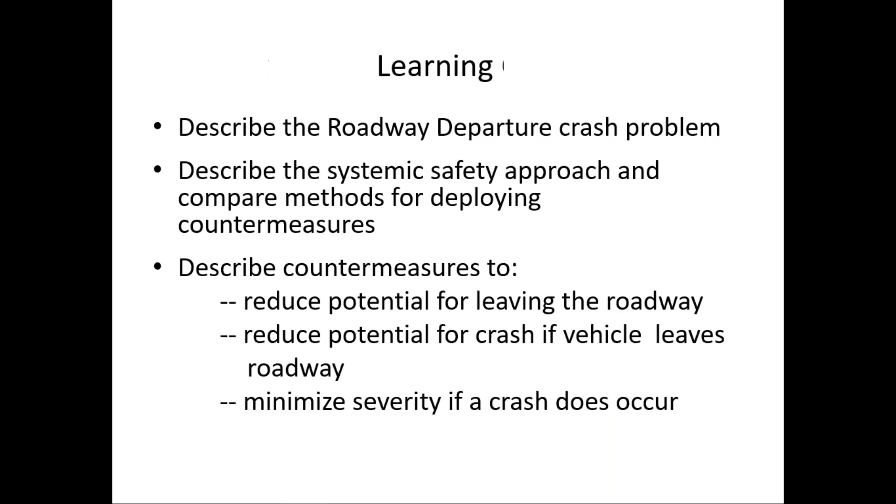I've broken this down into 6 parts over 3 days. Today we'll do an introduction and overview about roadway departures and about implementation approaches in part 2. Then we'll talk about keeping vehicles on the roadway using signing and delineation techniques, which will probably bring us into day 2 tomorrow as well. In part 4, we'll talk about keeping vehicles on the road using pavement and geometric techniques. Then we'll talk about improving the recovery area, which will probably bring us to the 3rd day, as well as minimizing the severity of crashes in part 6. So that's our agenda over the next 3 days.

Why don't we get started? Part 1 is the introduction and overview of the roadway departure crash problem. Here are the specific learning outcomes for this part. I hope you'll be able to describe the roadway departure crash problem, define what we mean by roadway departure crash, and understand some of the risk factors for addressing roadway departure crashes.

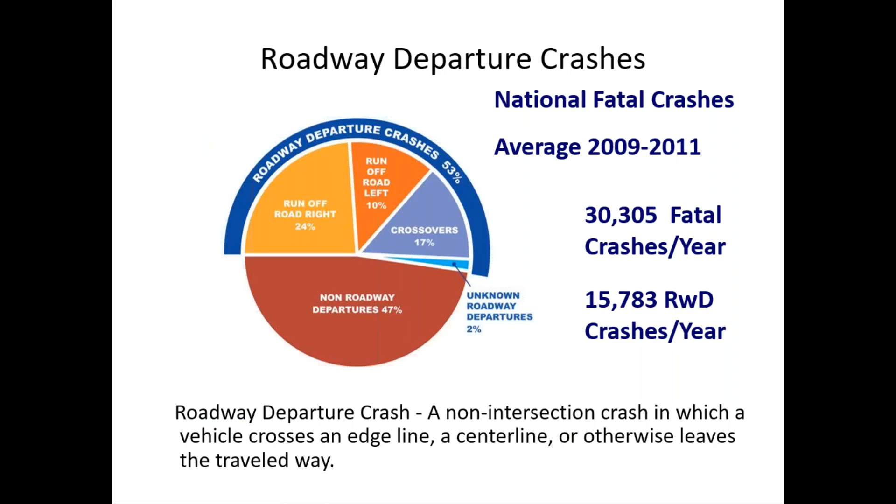It varies from year to year, but generally a little bit above 50% of all roadway fatalities are roadway departure crashes. Those can be run off the road to the right, about a quarter of fatal crashes, run off the road to the left, about 10%, and crossovers, meaning leaving the motorist lane of travel going left, crossing into the opposing direction of traffic. Non-roadway departures are usually between 45 and 50% of fatal crashes each year.

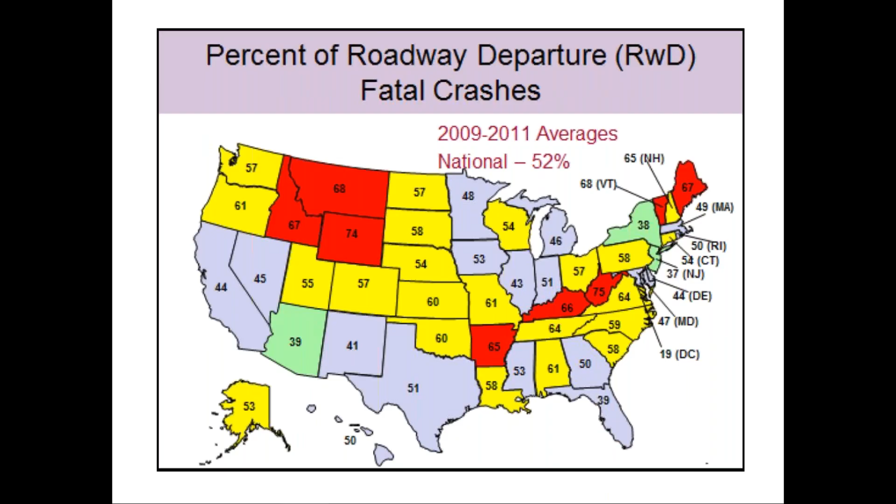So roadway departure crashes are significant. The figure now is about every 30 minutes there's a roadway departure fatality, meaning on an average day, about 48 people will die in roadway departure crashes. To bring it closer to home, if we're going to be in class for 6 hours this week, if this is an average week in the United States, while we're in this class there'll probably be 12 people nationwide that will die in roadway departure crashes. So it's a significant safety issue, which is part of the reason we're going to spend time this week talking about it and how we can reduce roadway departure fatalities and serious injury crashes.

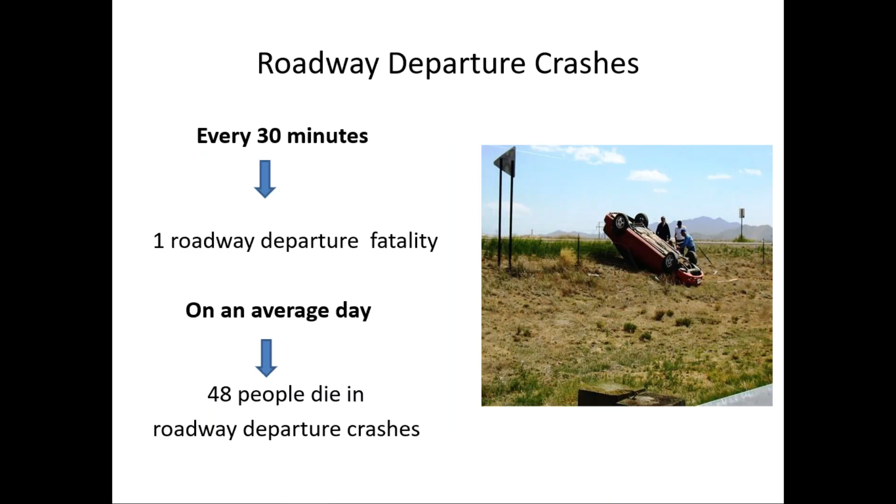Bring it a little closer to home. I know we may have folks from other states, but Ohio LTAP is sponsoring this class, so I'm going to focus on Ohio data. And of course, there's always a time lag of a year or two between the end of the year and when the final roadway statistics are published.

So this was the most recent full year of data for Ohio. Notice there were about 7,500 serious injuries in Ohio in 2023, and this was actually down from the previous year. About 1,250 fatalities, which was also down. So these trends are favorable.

Notice there were about, Ohio calls them lane departure fatalities, which I mentioned earlier, about 615, which was also down. And so that roadway departure percentage of all fatalities is about 50%, which I think is roughly consistent with what I mentioned nationally. I think nationally it's a little bit higher than 50% in terms of the roadway departure percentage of fatalities.

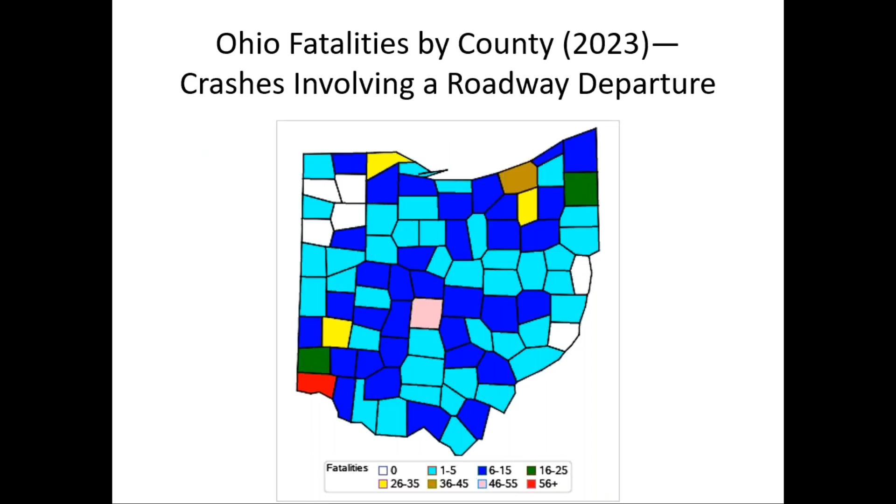But interestingly, notice there's a handful of additional counties that in 2023 did not have any roadway departure fatalities. So that's a good thing as well.

But I did want to mention just quickly, we're going to focus on the roadway departures since I think most people here are involved in the roadway and public works side of things. But some of the other emphasis areas obviously relate to roadway departures as well. For example, speed. Probably the higher the speed, the more likely someone is maybe to depart the roadway at some point. And it may also be related to young drivers, for example.

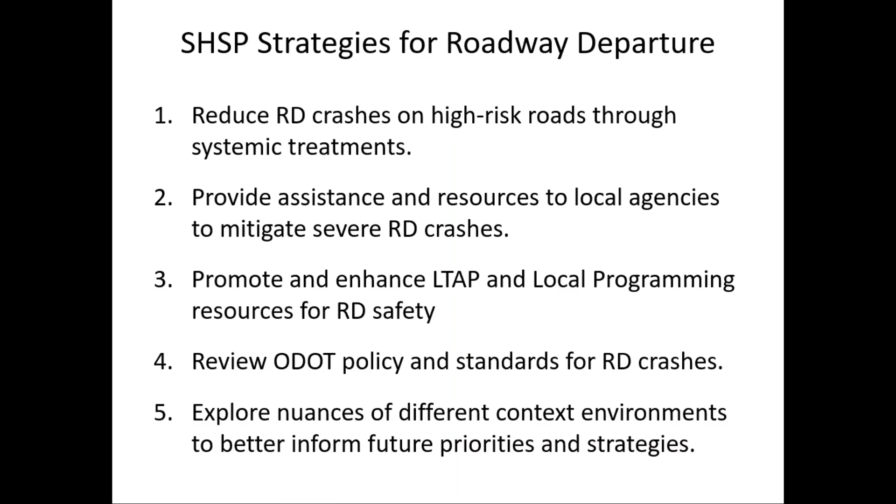With that background, let's look in more detail at some of the characteristics of roadway departure crashes. This first one shows the first harmful event in fatal roadway departures—the first event that caused harm in a roadway departure crash. Notice the light blue on the right of this pie chart is a fixed object. In almost 60% of fatal roadway departure crashes, the first harmful object could be a utility pole, a tree, a rock outcrop, those sorts of things.

Notice about a quarter of the first harmful events were another vehicle striking another vehicle, which could be a lane departure crossing the center line into the opposing lane and striking another vehicle. In about 1 out of every 6 fatal roadway departures, the first harmful event was an overturn, meaning probably the vehicle left the road on a steep slope and overturned. Then in 2% of the cases, the first harmful event was pedestrian or bicycle.

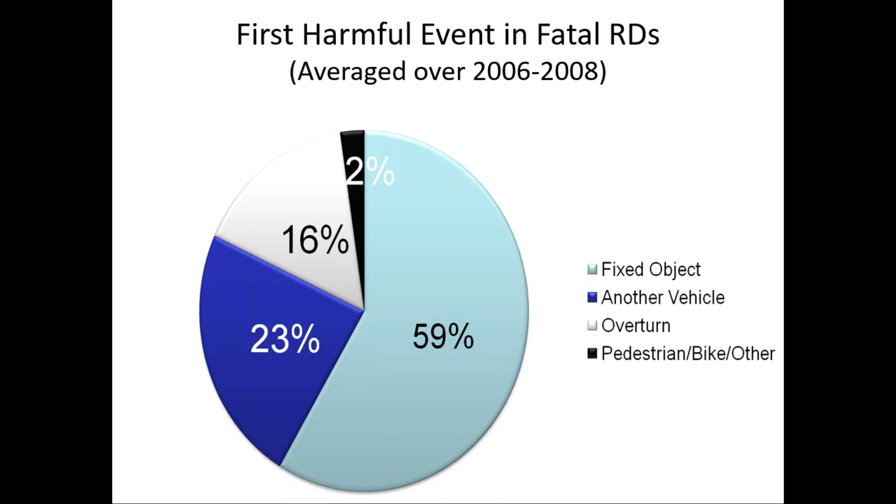Looking at each of these in more detail, starting with the overturn category, then we'll look at opposing traffic and trees and shrubs. Notice that for the overturn, the risk factors are rural areas, which is where the slopes or side slopes would be along the roadway, posted speeds greater than 45 miles per hour—so rural road speeds as opposed to city street speeds—and curves. We've talked about how roadway departures tend to be overrepresented in curves.

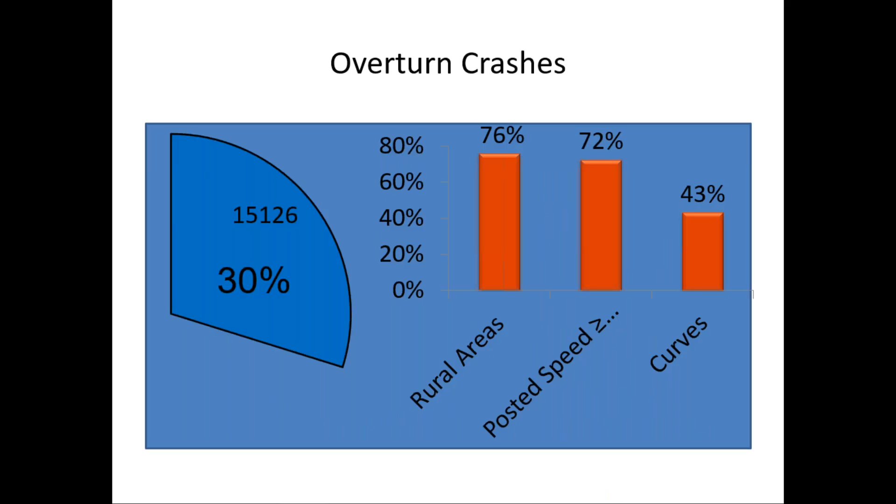Fixed object crashes overall were 19% of roadway departures causing the most harm for occupants, but notice trees are 44% of fixed object fatalities. In fact, as we'll talk about, in the United States trees are the most commonly struck fixed object alongside the road.

But you can see some of the other fixed object crashes involve signs, poles, and barriers. Those are features that we in the public works field put on the roadway to communicate with motorists, to light the roadway, and to shield motorists from hazards along the roadway in the case of barriers. So some of these features we actually put out along the roadway, we need to recognize can be and are fixed objects that can cause harm to motorists.

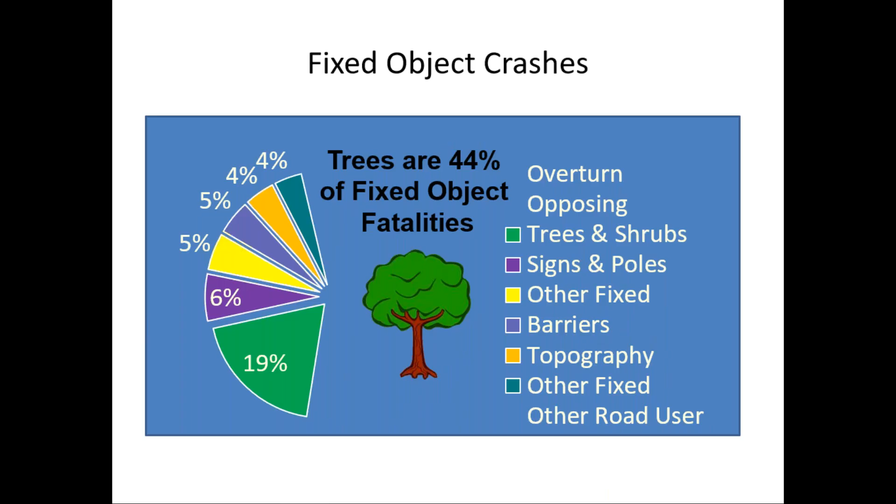So here's a little review. Welcome your participation. You can just type your responses in the chat and Mike can share some of those with us. But here's our first review question.

Which of these crash types are included in the definition of a roadway departure crash? Crashing into a fixed object like a tree or pole, hitting a deer in the traveled way, rolling over on the roadside, right angle impacts at intersections, head-on crashes, or hitting a pedestrian in a crosswalk.

Which of those do you think would be included in the definition of a roadway departure crash as we've talked about it here? Any thoughts on that? Yes, thanks Ron, we have people typing in. Several folks are saying A, C, and E.

A, C, and E. So let's take a look at that. A is crashing into a fixed object like a tree or a pole, which by definition will be alongside the road rather than in the road. So yeah, definitely A would meet the definition of a roadway departure crash. C, rolling over on the roadside, implies that the vehicle has left the roadway, so yes, that would be correct as well.

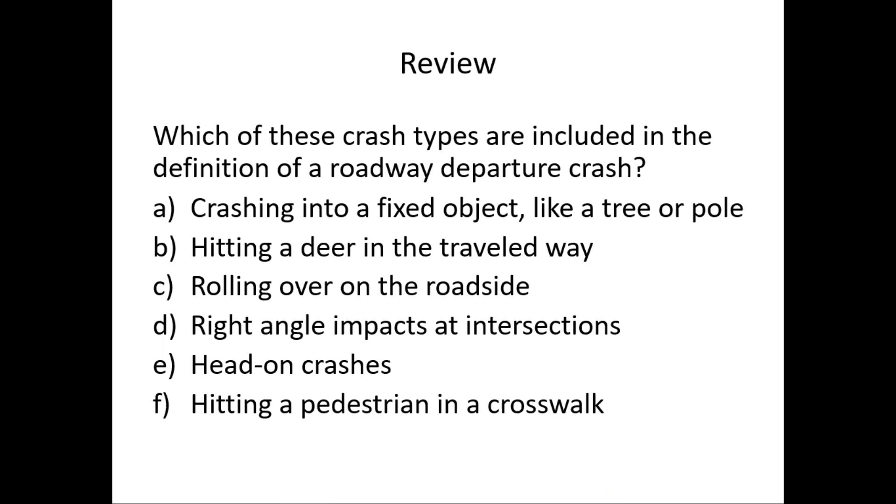Hey Ron, yeah, there's a question. Is there a breakdown of utility poles versus street signs or other objects? Yeah, there is, a good question. I think I will share that with you a little bit later when we start looking at fixed objects. I think I have a more detailed pie chart. If I don't at that time, then holler at me again and I'll be sure to address that. Sounds good, thanks, thanks.

So addressing risk factors, this is NCHRP Report 500. It's a series of 23 volumes that presents some, identify some roadway safety issues, not just roadway departures, and also some strategies for reducing crashes. It's a little bit dated now, but I think it still has some good information. Some of you may be familiar with it. Later on I'll provide some links where you can access these online.

But they talk about 3 ways to address risk factors, and this has been adopted by others, I believe AASHTO, but also it's the same organizational framework that I'll be using for this class. So they talk about first trying to keep vehicles from leaving the roadway. What can we do to keep vehicles on the roadway? Of course, if a vehicle stays on the roadway, we won't have a roadway departure.

But if a vehicle does leave the roadway, how can we minimize the likelihood of that vehicle crashing into an object or overturning on the side slope? And then the third method to address the risk factors is to reduce the severity of the crash. So notice in B, we're talking about minimizing the likelihood or the probability of a vehicle striking a fixed object or overturning on the slope. But C gets at reducing the severity if a crash does occur. And we'll look at each of these,

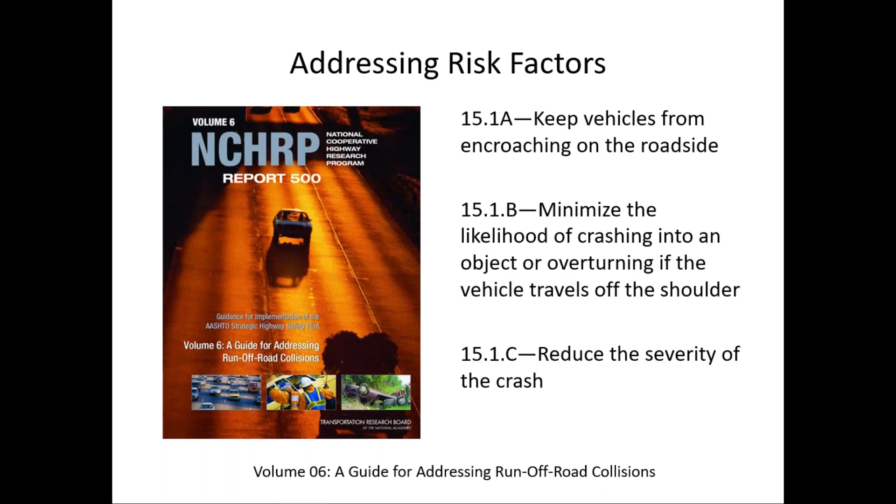starting with keeping vehicles on the roadway first, so they don't encroach on the roadside.

In some of these, I'll be mentioning crash modification factors, or CMFs, and these come from the Highway Safety Manual. They basically account for the difference between the base and the actual geometry or situation. They help us estimate the effects of individual geometry elements or signing or countermeasures on safety. They can be greater than or less than 1.

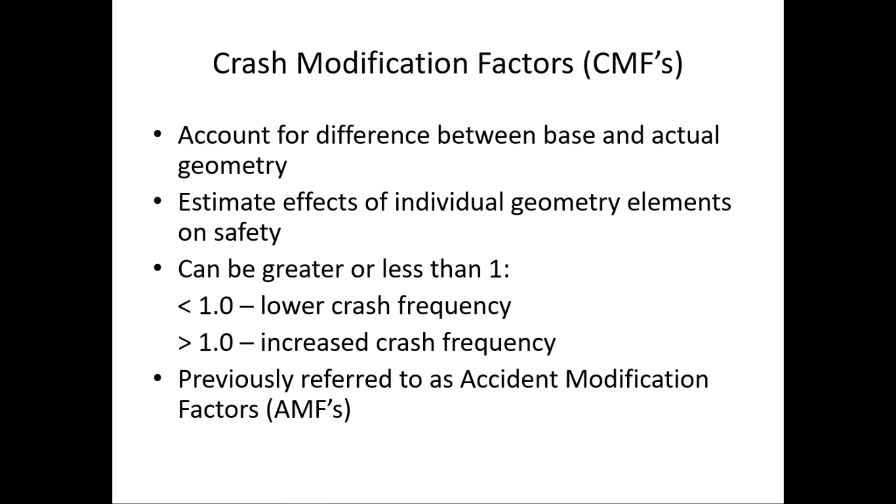If a CMF is less than 1, that means the countermeasure, such as signing or slope flattening, whatever it might be, reduced crashes, and that's a good thing. We want the CMF hopefully to be less than 1. But let's face it, sometimes we may do something and unfortunately the crash experience increases. So we may have CMFs greater than 1, but that's not a good thing because that means the crash frequency increased after the countermeasure was implemented.

You may also see as we go through here, in addition to CMFs, reference to CRFs, or crash reduction factors. This is the percent reduction in crashes that might be expected from a countermeasure. If we have a negative CRF, that means the treatment or countermeasure might be expected to increase crashes.

There is a relationship between CRFs and CMFs. A crash reduction factor is 1 minus the CMF. So if we have a CMF of 0.9, that's the same as a 10% crash reduction factor. Just keep that in mind as we go through here, since for a number of these countermeasures or treatments throughout the week, we'll talk about CMFs or CRFs. So I wanted to give a little bit of background.

Is a CMF of 1.1 a good thing? No. If the CMF is above 1, that means that treatment could be expected to increase crashes, which is not a good thing. So hopefully our CMFs will be less than 1.

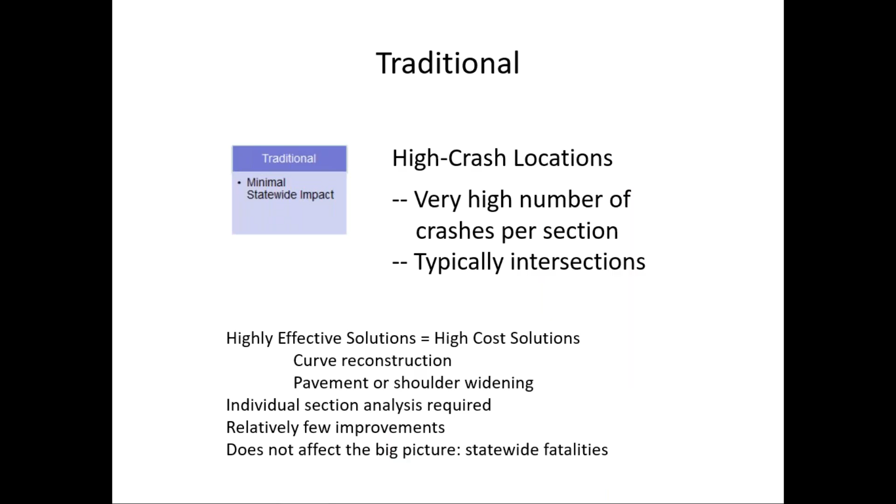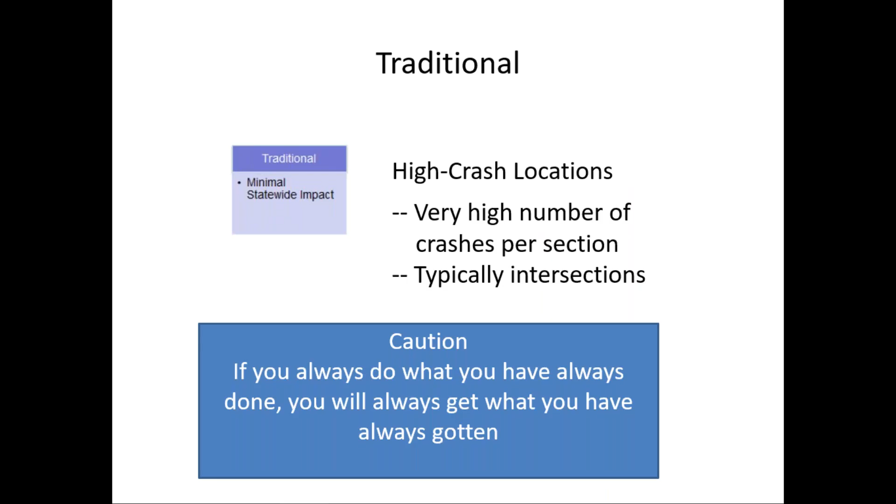So that's led to looking at other approaches that can overcome some of these drawbacks of the traditional approach, because if you always do what you've always done, you'll always get what you've always gotten. So what can we do to have a greater jurisdiction-wide impact when it comes to, for example, roadway departures? Which leads to a little example exercise here.

This may be where the systemic approach actually started historically, in Humboldt County, California, a rural county in Northern California. The county engineer was concerned about fatal crashes happening in the county.

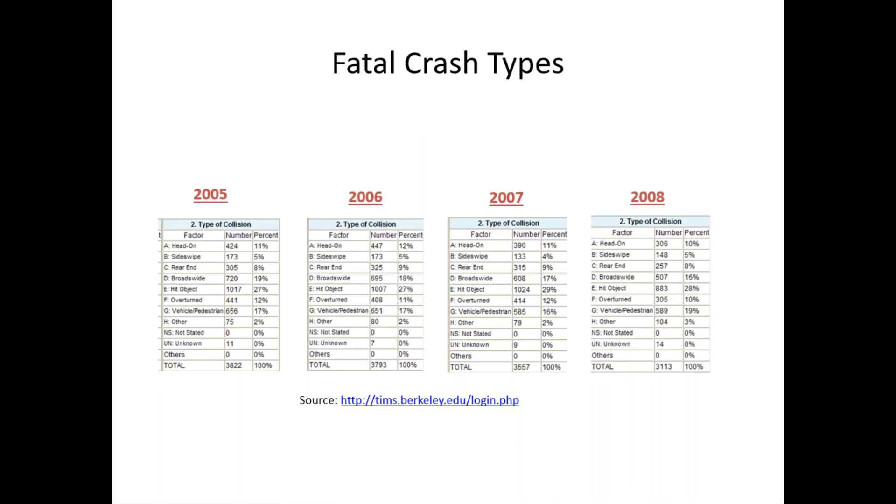Head-on crashes, about 10 to 12% each year. Also overturned crashes, item F of the factors, about 10 to 12% each year. So it struck him that in terms of fatal crash types, the overturn, the head-on, and the hit fixed object stood out as key crash types. All of these, if you think about it, are really roadway departure crashes.

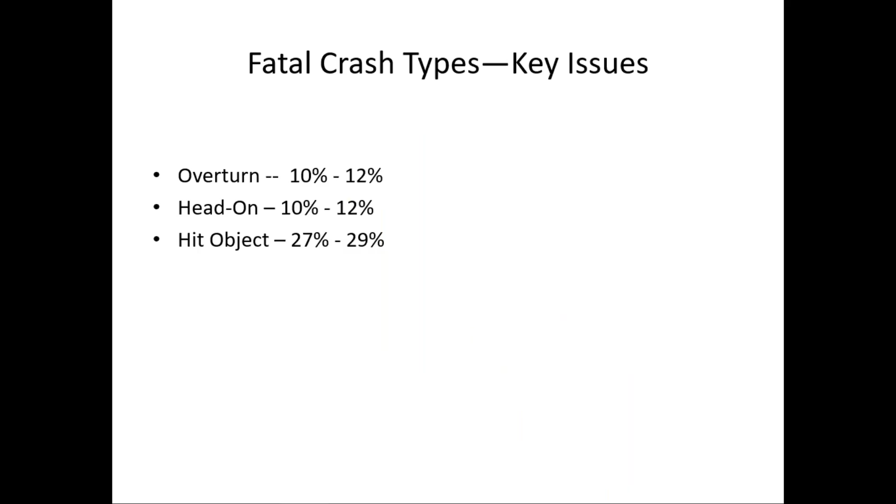So what we can say is that fatal crash locations are random, but fatal crash types are predictable. That's the basis for the systemic approach, which we'll look at.

So why do drivers leave the roadway? It could be a variety of reasons. It could be roadway condition, icy pavement, heavy rain, wet pavement, a polished roadway condition, or rutted pavement that may contribute to leaving the roadway. It could be collision avoidance, not only avoiding another vehicle or a pedestrian, but avoiding animals. Here in West Virginia, that's a major cause of roadway departures, drivers trying to avoid a deer, bear, or other animal in the roadway.

It could be vehicle component failure, a tire blowout, steering failure, brake failure, something like that. And it could be driver error, which could include fatigue, distraction, falling asleep. All of those things I would put under driver error. So there's a variety of reasons drivers leave the roadway.

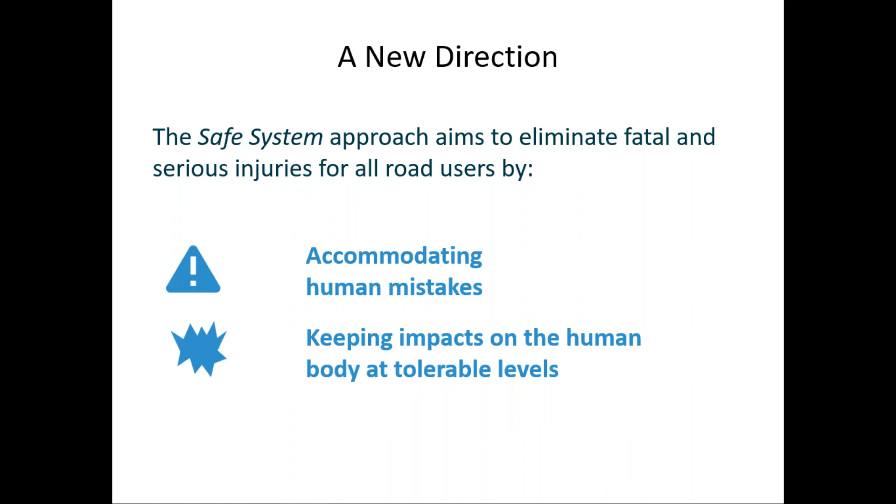I also wanted to mention, before we get too far into this, the new direction. Some of you are probably familiar with it already, but it's called the Safe System Approach, whose goal is to eliminate fatal and serious injuries for all road users by, number one, accommodating human mistakes, and number two, keeping impacts on the human body at tolerable levels.

So this is kind of the wheel that explains or describes the safe system approach. You see the 6 safe system principles around the circumference of this circle.

Death and serious injury is unacceptable. Humans make mistakes. Humans are vulnerable. Responsibility is shared, whereas in the past, maybe it was the driver was always responsible, but now it's recognized that throughout the system, we have a shared responsibility. Safety is proactive rather than reactive, and redundancy is crucial. Those are the 6 safe system principles.

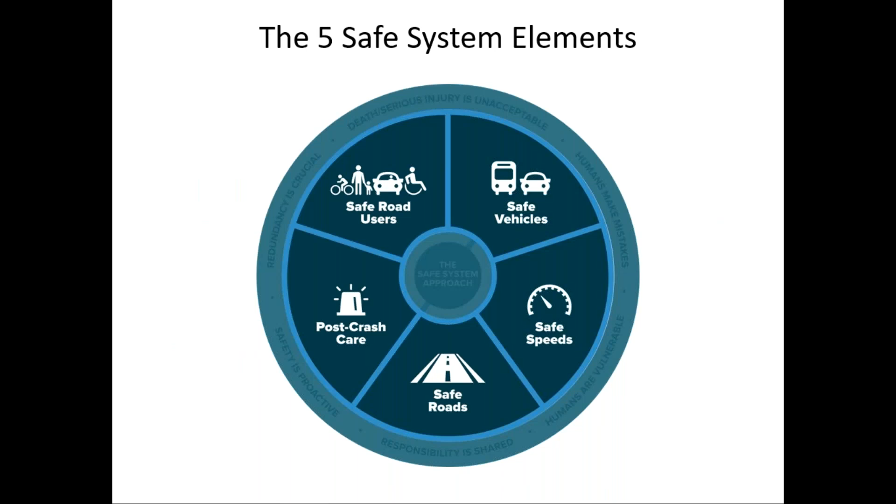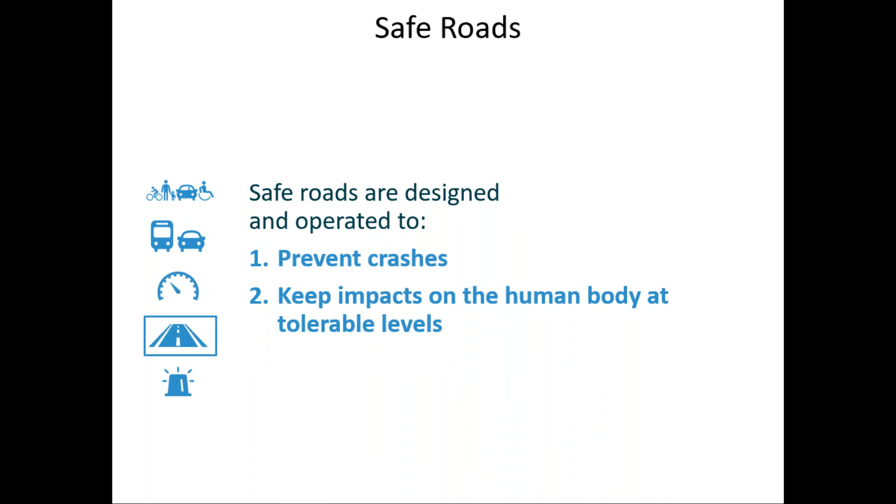And then within that, between the spokes of the wheel, if you will, you see the 5 safe system elements: safe road users, safe vehicles, safe speeds, safe roads, and post-crash care. So again, this is not just the roadway or the engineering side of things, but it even gets into the post-crash care and emergency response, like you see here. So safe roads are designed and operated to prevent crashes, and as I mentioned earlier, keep impacts on the human body at tolerable levels.

Which brings us to the systemic safety improvement strategy that I alluded to earlier. It's defined as an improvement that's widely implemented based on high-risk roadway features that are correlated with particular severe crash types. And the focus is on lower cost countermeasures.

And you can see that it's kind of based on the potential for a specific type of severe crash to occur at a specific location because of that location's characteristic or features. So whereas the traditional approach focuses, say, on one curve or one intersection, the systemic approach might look at all curves with certain characteristics on the system or in the network, and then apply low-cost countermeasures at all of those locations.

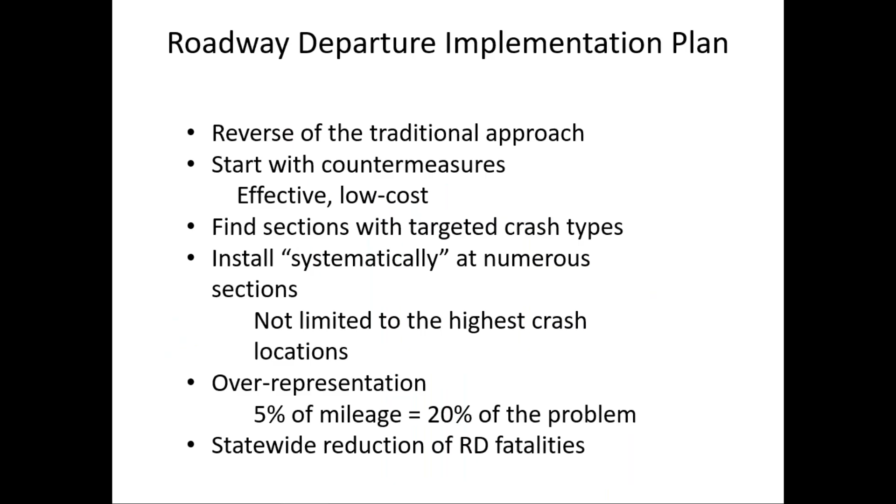It's kind of the reverse of the traditional approach. It starts with countermeasures, low-cost countermeasures, and then finds sections with those targeted crash types and installs the countermeasure systematically at a number of locations, curves, or intersections. So it's not limited to the highest crash locations. Using this approach, we can achieve significant jurisdiction-wide reduction of roadway departure fatalities.

I also wanted to mention, with the safe system approach, we should be proactive rather than reactive. Here's one way of thinking to accomplish that: keep an eye out while you're riding the roadways or while your crews are riding the roadways, and be on the lookout for certain things, certain features. I call this reading the road, looking for indications that road users may be having problems traveling a section of roadway. Sometimes we can identify issues and take steps to resolve them before crashes start occurring.

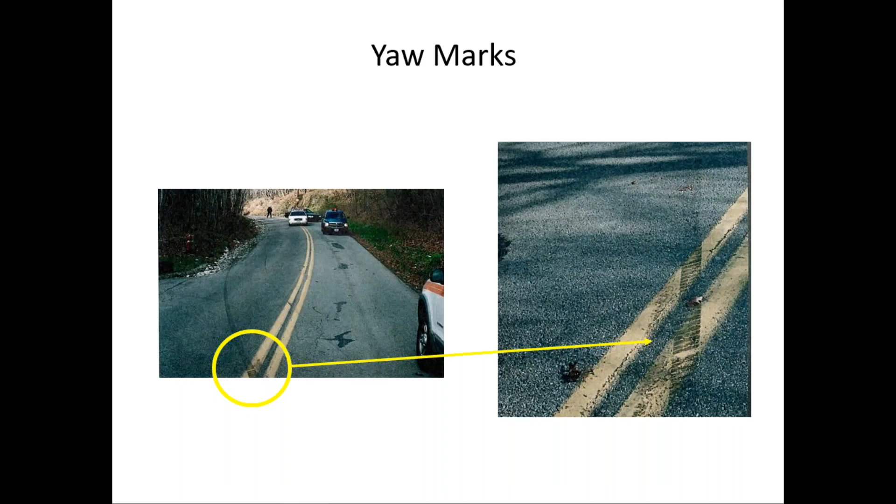The yaw marks are found usually where drivers are overcorrecting or oversteering, so they have a different causation than locked wheel tire marks. Where you see a concentration of yaw marks on a road, that can be an indication that something's going on. We don't see that here, we just see one yaw mark. That wouldn't necessarily concern me because we can find these marks anywhere, but where you start to see a clustering or concentration of them, that's when I would look in more detail.

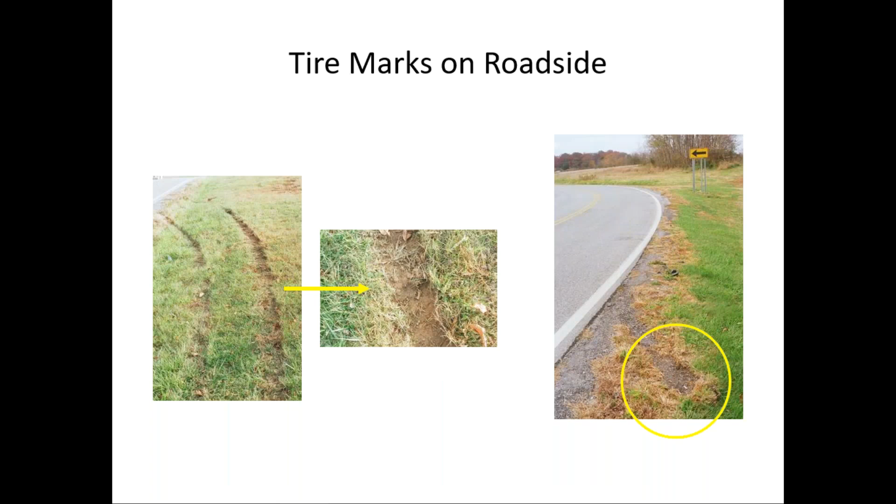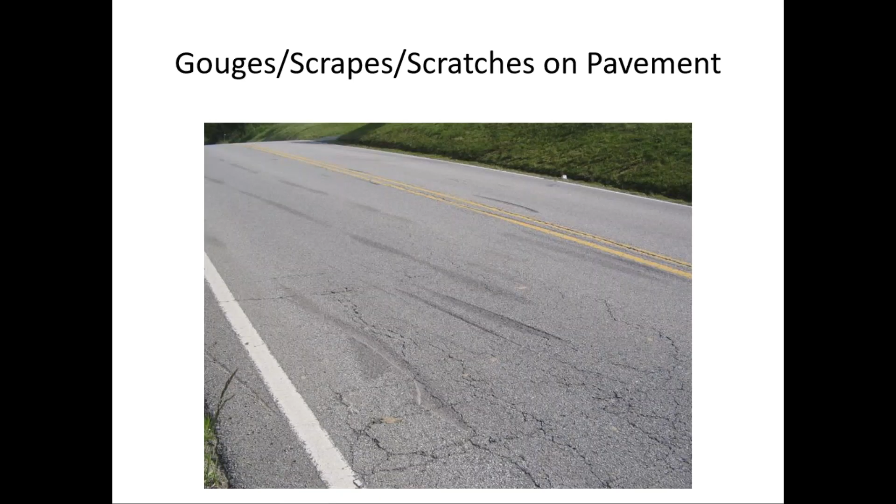Gouges, scrapes, and scratches on the pavement. We'll find these really anywhere, but when you start to see a concentration like this, that's an indication that something's going on. Vehicles look like they're overturning and sliding on the pavement.

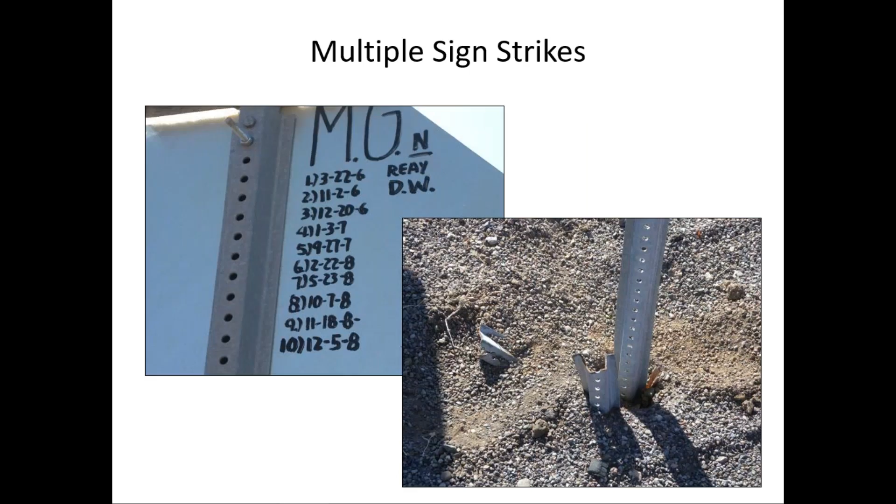I guess my question is, why doesn't somebody in the agency say, hey wait a minute, we're out here all the time replacing this stop sign. What can we do? Do we need to change the location of the stop sign or redesign the intersection, rather than just continuously replacing it? So I call that reading the road as well, looking for indications that motorists are having difficulty negotiating the roadway.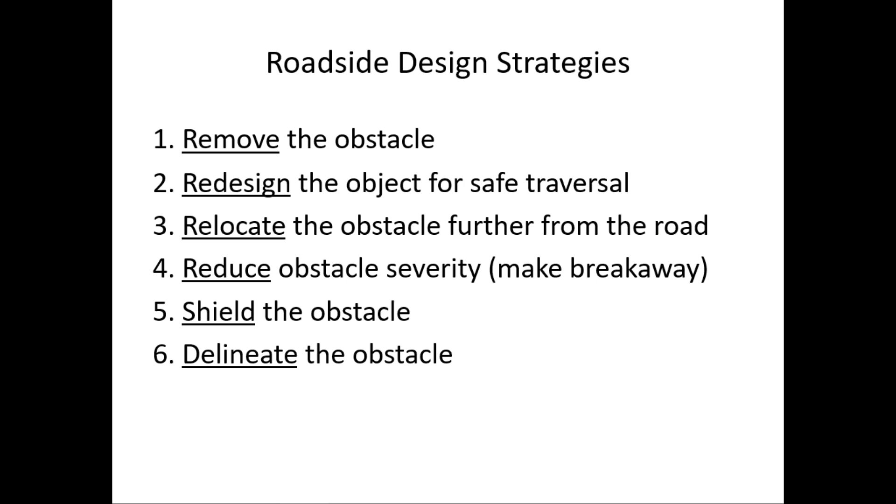So keep this in mind as we go through the next couple of days. So here we've talked about the systemic safety approach and different methods for deploying countermeasures. We also talked a little bit about reading the road. Any questions or concerns about any of that? Thanks, Ron. We don't see any additional questions at this time.

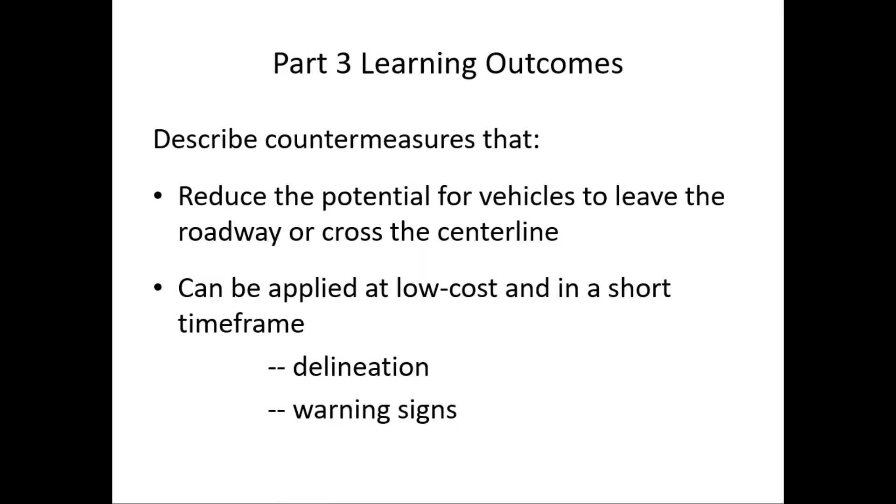Okay, thank you, Mike. That brings us to part 3, which is using signing and delineation to keep vehicles on the roadway. So that's what we're going to talk about. First item is keeping vehicles on the roadway, and we're going to focus on delineation and signing. So these are kind of low cost, short time frame countermeasures. And just to orient you, we're going to look at a number of different things today and tomorrow in terms of ways to keep vehicles on the roadway. In this part, we're going to look at marking and delineation and signs.

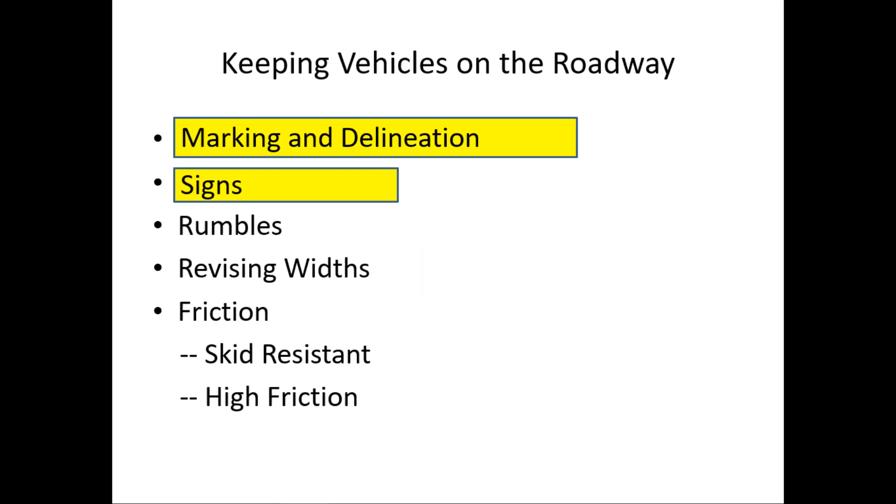What are the crash types addressed by delineation? Well, curve crashes, head-on collisions, so lane departure crashes, roadway departure crashes, nighttime crashes, and other run off the road crashes.

Some of what we're going to be referring to here when we're talking about signing and marking obviously relates to the Manual on Uniform Traffic Control Devices. And as you may be aware, there are three small but important words within the manual. If it's a shall condition, it's a standard, it's a requirement. If it's a should condition, it's recommended or it's guidance. And if the word may is used, it's an option that's available to the practitioner.

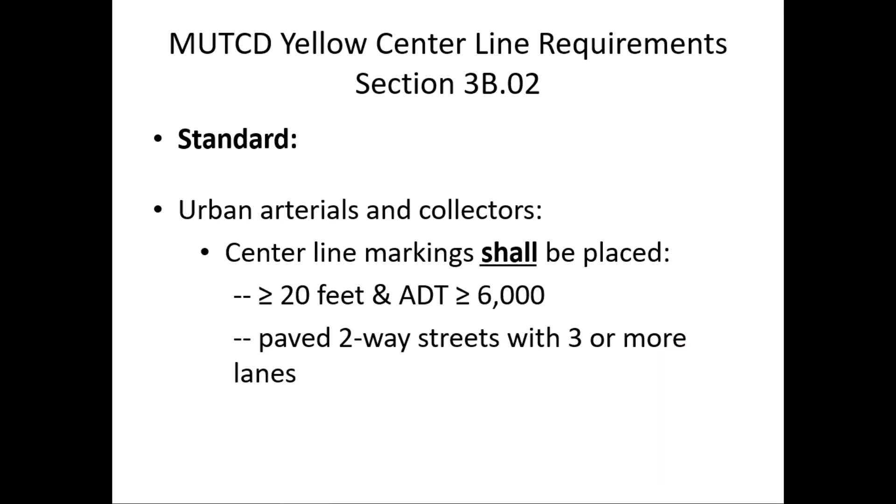So let's start with lane lines, yellow center lines. What does the MUTCD say about center lines? The standard is that for urban arterials and collectors, center line markings shall be placed on roadways greater than or equal to 20 feet and with an average daily traffic volume greater than or equal to 6,000 vehicles per day, and on paved two-way streets with 3 or more lanes. So these are the conditions where center line markings are required on urban arterials and collectors.

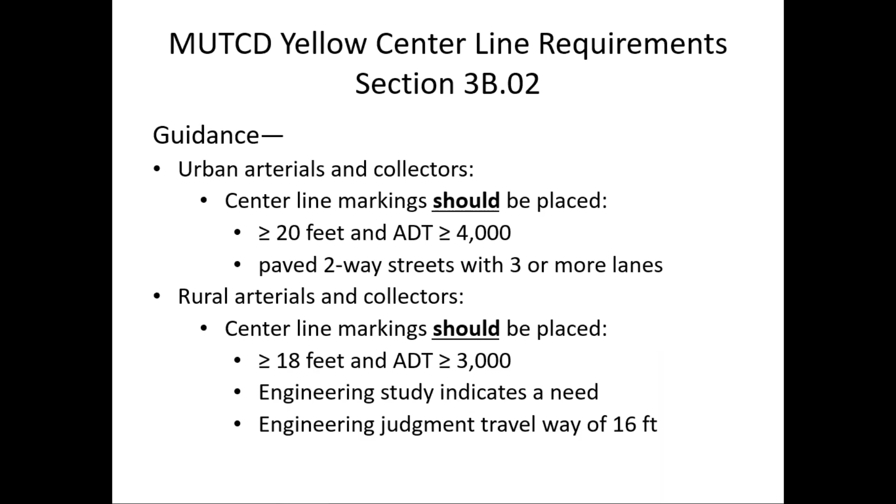The MUTCD also provides some guidance. For urban arterials and collectors, center line markings should be placed where the roadway is greater than or equal to 20 feet in width and the average daily traffic volume is greater than or equal to 4,000 vehicles per day, and on paved two-way streets with 3 or more lanes. On rural arterials and collectors, center line markings should be placed where the roadway is greater than or equal to 18 feet in width and the average daily traffic volume is greater than or equal to 3,000 vehicles per day, or where an engineering study indicates a need, or in an engineering judgment situation if the travelway has a width of 16 feet.

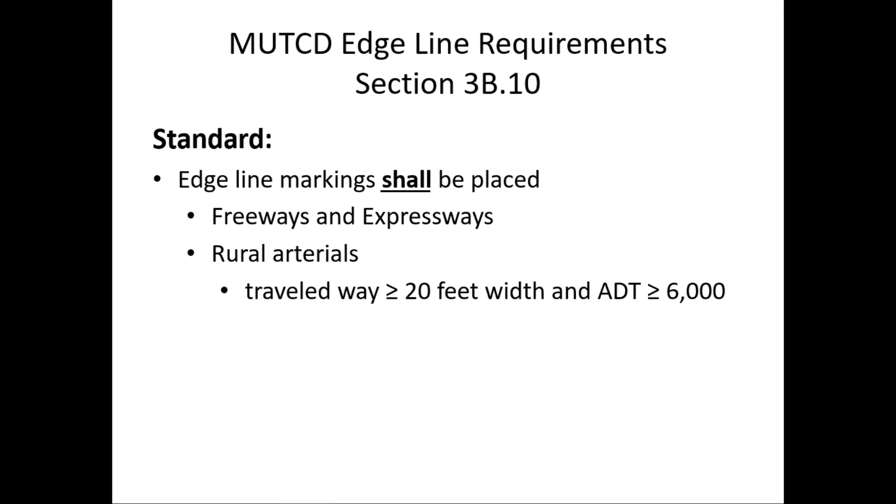Now turning to edge lines, the white lines on the right side of the roadway, sometimes called fog lines. The standard in the MUTCD is that edge line markings shall be placed on freeways and expressways and on rural arterials with a traveled way of greater than or equal to 20 feet in width and an average daily traffic volume greater than or equal to 6,000 vehicles per day. That's the standard for edge lines.

In terms of guidance or recommendation, edge line markings should be placed on rural arterials and collectors with a traveled way width greater than or equal to 20 feet and an average daily traffic volume greater than or equal to 3,000 vehicles per day, or where an engineering study indicates a need for edge lines.

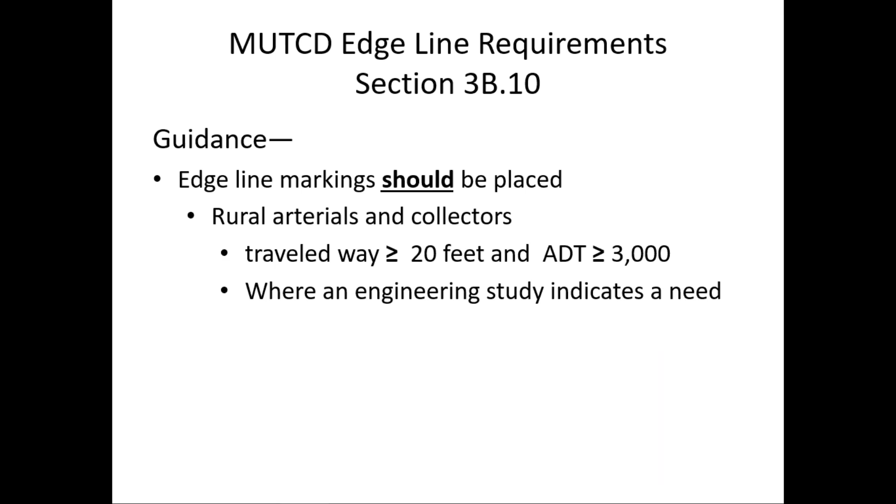What about the effectiveness of edge and centerline markings?

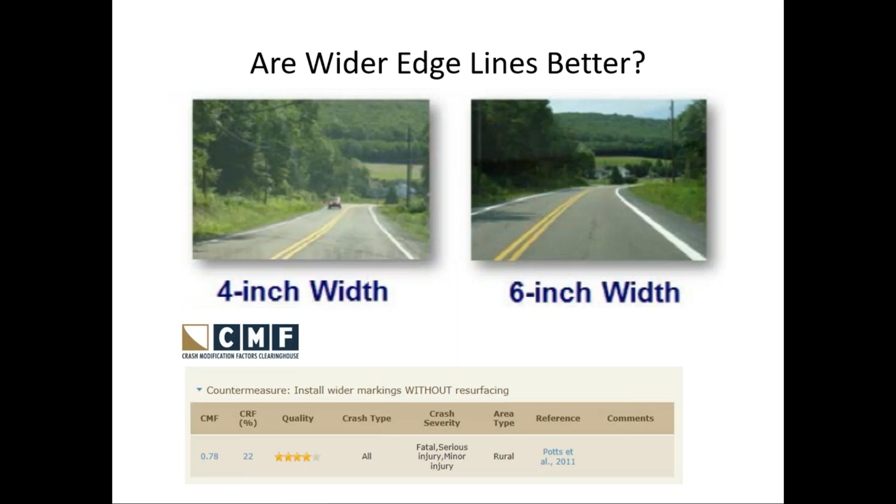Again, this comes from the CMF clearinghouse. The countermeasure is installing wider markings without resurfacing, so that's not part of a paving project, just installing wider markings. This is in rural areas, for fatal, serious injury, and minor injury crashes. On the left, you can see the CMF is 0.78, so the CRF would be 22%. It appears that wider edge lines do have a crash reduction effectiveness value of about 22% based on this study.

The Texas Transportation Institute at Texas A&M University also looked at width of edge lines. They found that wide edge lines reduce total crashes between 15 and 30%, and fatal and injury crashes by 15 to 38%. They also found, in terms of benefit cost ratio, it was between $33 and $55 for each dollar spent, which would be a significant benefit cost ratio in my opinion.

They also found that wider edge lines offered similar results, but without the concerns associated with shoulder rumble strips. So the findings in terms of crash reduction or effectiveness were similar to the shoulder rumble strips, and we'll talk about rumble strips probably tomorrow. Some of the concerns are for bicyclists and for noise and those kinds of things.

We're talking about pavement markings. There's a variety of different materials available. They do need to be retroreflective, often accomplished with glass beads, but they can be supplemented with raised pavement markers or recessed pavement markers, which provide a higher level of retroreflectivity.

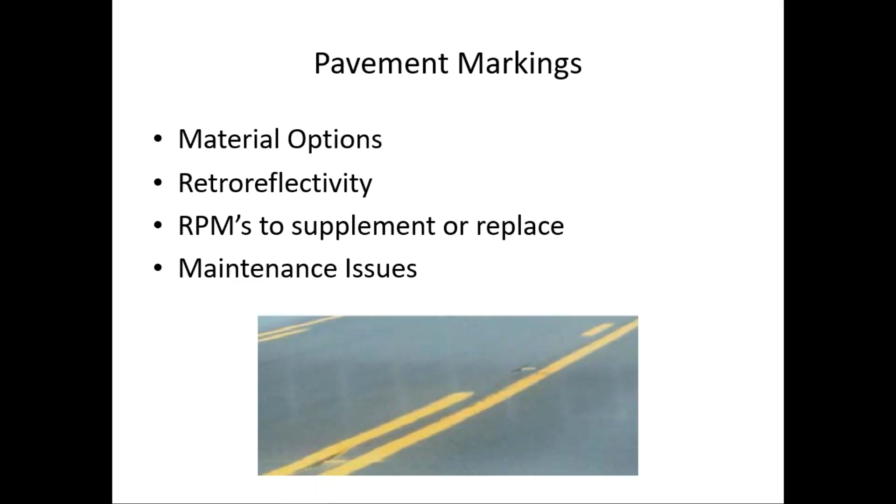But all pavement markings do have maintenance issues. They wear out, they can lose their retroreflectivity. They can be covered by mud or snow or ponded water, that sort of thing. But pavement markings are a way to help keep drivers on the roadway.

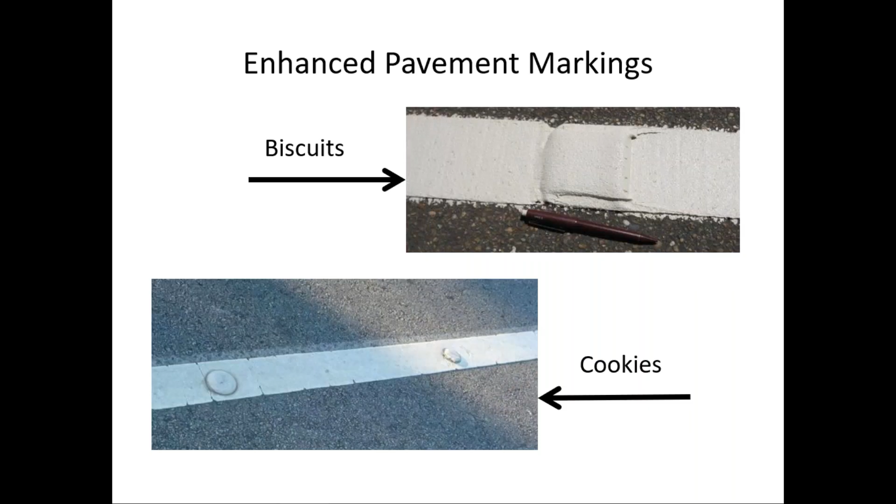Some agencies use enhanced pavement markings, the so-called biscuits or cookies, which provide a kind of raised surface above the normal line. The issue with this, though, probably in the northern part of the United States, Ohio, West Virginia, and so forth, is that these are very susceptible to snowplow damage because they protrude or project above the pavement surface.

Another pavement marking that's been used, I believe, in Pennsylvania, perhaps other states, is the curve advance marking. These are pavement markings that provide information about the curve, and they're on the roadway, so they're in the driver's direct line of sight in their field of view, and they supplement the curve warning signs that would still be needed on the roadway. So these are a supplemental type of measure.

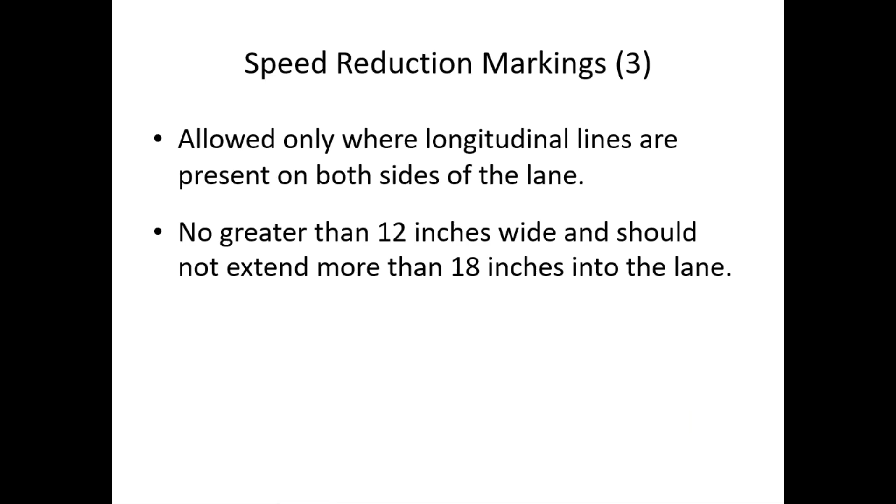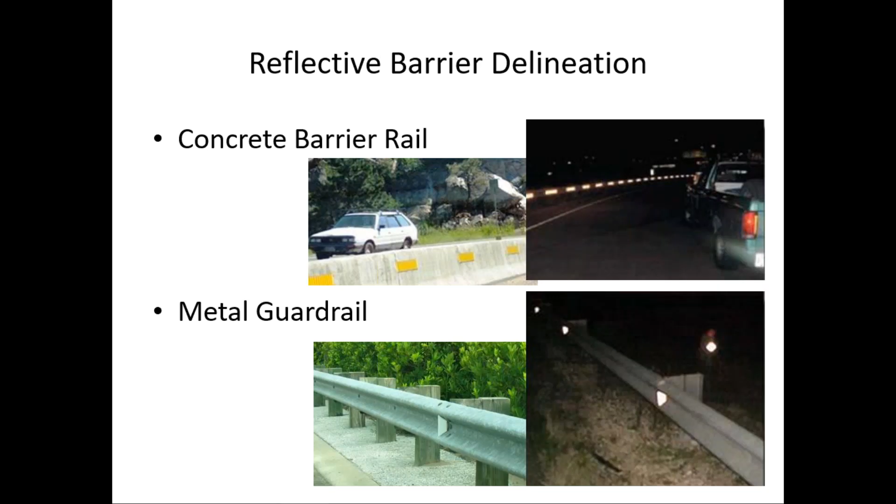Another example here, notice the W-beam guardrail, they've put reflective tape inside there, and it makes an effective form of delineation of the curve in the roadway. So signage to keep vehicles on the roadway.

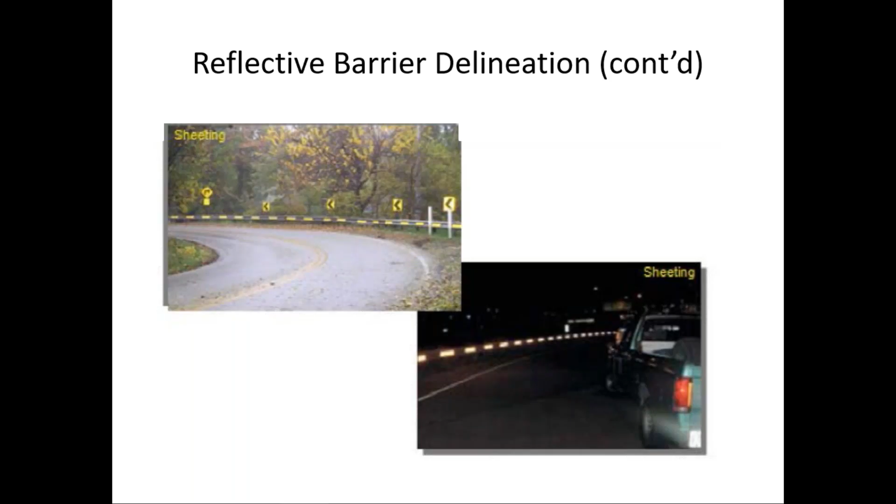We've looked a little bit at pavement markings. Now what about signage? You see some examples of the horizontal curves. The crash types addressed by signing are curve crashes, of course, and also nighttime crashes, again mostly run-off-the-road crashes.

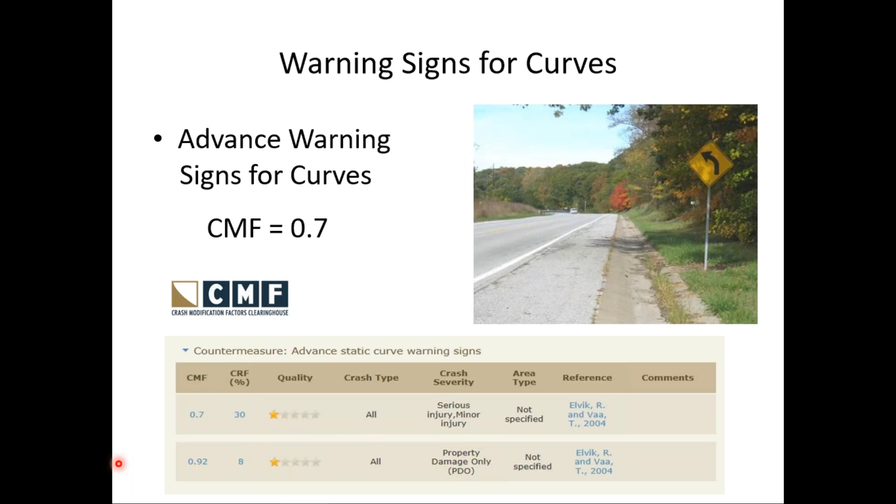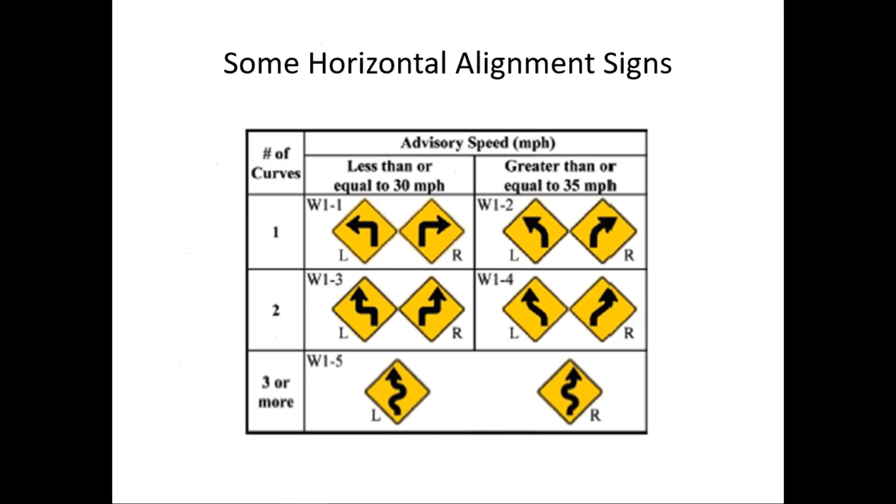Section 2C.06 talks about device selection, and this is one area I should note that in the MUTCD 11th edition, there is some significant change from the previous edition. Device selection has changed significantly, making it a multi-step process now compared to what it was in the previous edition of the manual.

They show criteria in chart A of table 2C-4, which we'll look at in a minute. Notice it says those criteria shall be used to determine the need for devices for changes in horizontal alignment. So it's a two-step process: you use chart A to determine the need, and then if the use of a device or devices is indicated by chart A, you use chart B of that same table. Chart B shall be used to specify the types of devices to be used in advance of and/or along a horizontal curve, except as provided in paragraphs 3, 5, and 6 of this section. So it's a little more involved process than in the past, but we'll go through it and look at an example.

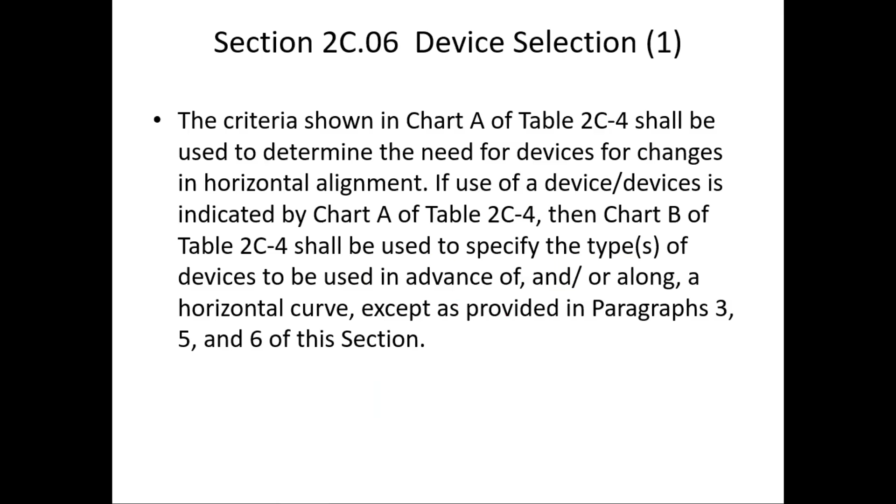The speed differential in chart B shall be the difference between the horizontal curve's advisory speed and the roadway's posted speed limit, the statutory speed limit if none is posted, or the 85th percentile speed on the approach to the curve, sometimes called the prevailing speed. So users can determine that speed difference based on the difference between the advisory speed and either the posted speed limit, the statutory speed limit, or the 85th percentile speed on the approach.

I think that's a little more flexibility than existed in the previous edition of the manual in terms of that speed differential.

I mentioned paragraphs 3, 5, and 6. This is what paragraph 3 says: a one direction large arrow sign may be used in place of or to supplement delineators or chevron alignment signs when A, site conditions limit the number of delineators or chevron alignment signs that are visible, or B, the number of delineators or chevron alignment signs that can be installed within the change in horizontal alignment is less than the number determined by the spacing specified in sections 2C.08 or 3G.04.

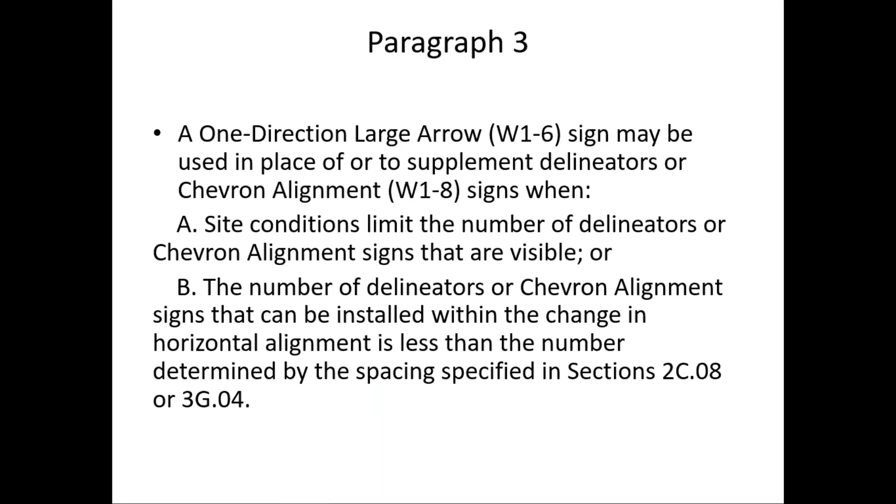So they allow the use of the one direction large arrow in place of or to supplement delineators or chevrons when you may be limited in the number of chevrons you can use. An example, I may show it later on in the week, but there's a curve I'm familiar with, not too far from me, a relatively sharp curve where chevrons should probably be installed. But right at the outside of the curve is an area where like 3 or 4 driveways come together into one big driveway or access point to the roadway. And of course, you couldn't reasonably put chevrons in that area of the driveway opening. So this is saying you could use a one direction large arrow in that situation.

Paragraphs 5 and 6. Paragraph 5 says devices for changes in horizontal alignment may be omitted when the speed limit on the approach to an alignment change is 20 miles per hour or less. Paragraph 6 says devices for changes in horizontal alignment may be omitted on urban streets with an AADT of 1,000 vehicles per day or less. So in 5 they're talking about low speed roads, and in 6 they're talking about lower volume roads in urban areas where those devices can be omitted. And notice it's a may be omitted, so it's an option.

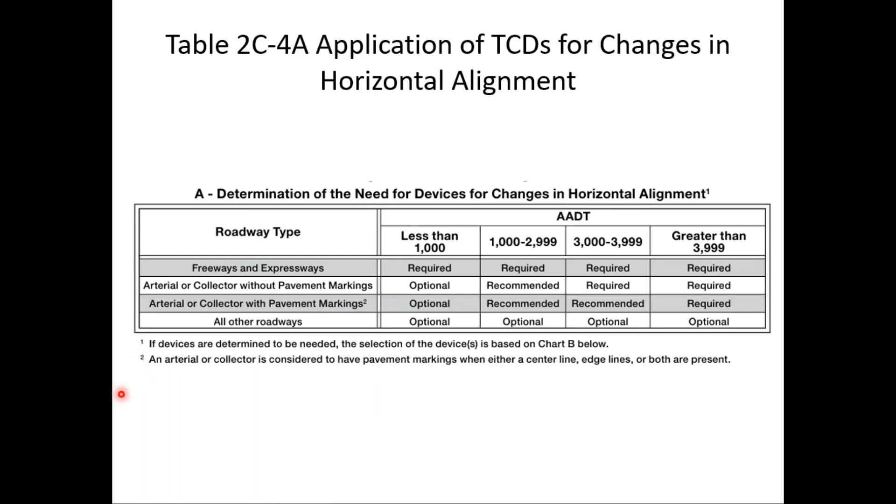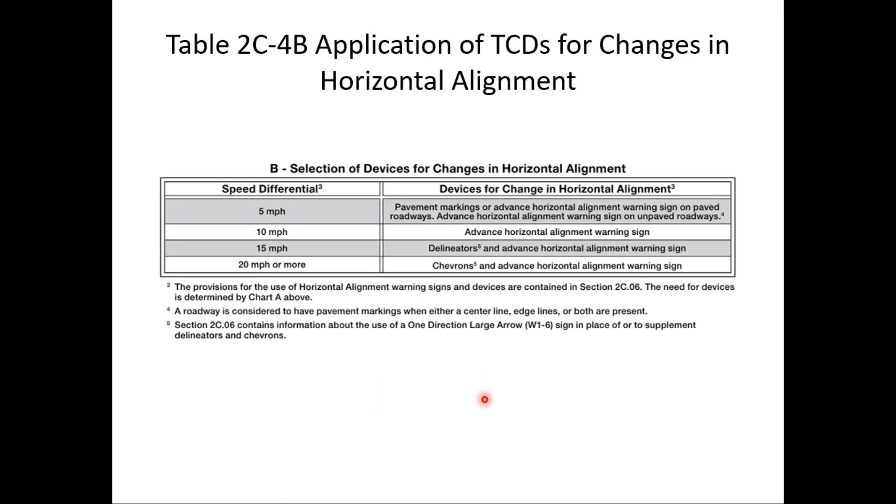Section 2C.07 addresses horizontal alignment signs. It says if table 2C-4 indicates that a horizontal alignment sign is required, recommended, or allowed, the sign installed in advance of the curve shall be a curve sign unless a different sign is recommended or allowed by the provisions of this section. And the guidance says a turn sign should be used instead of a curve sign in advance of a horizontal curve that has an advisory speed of 30 miles per hour or less.

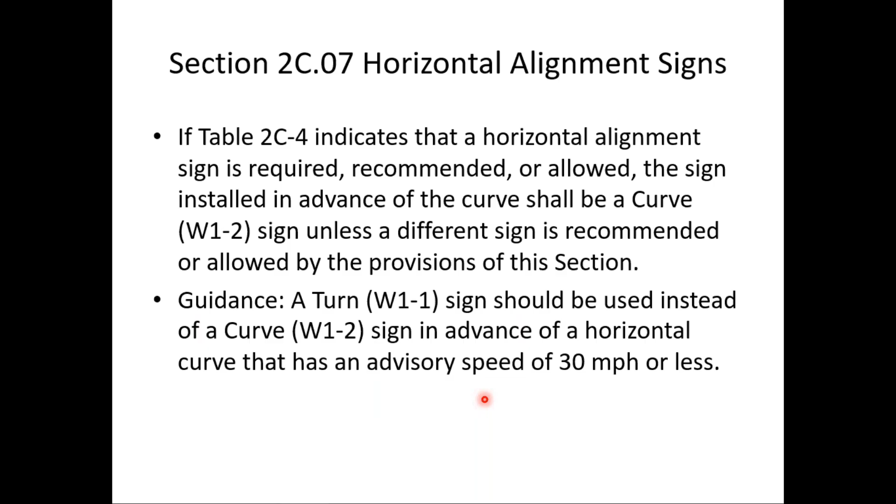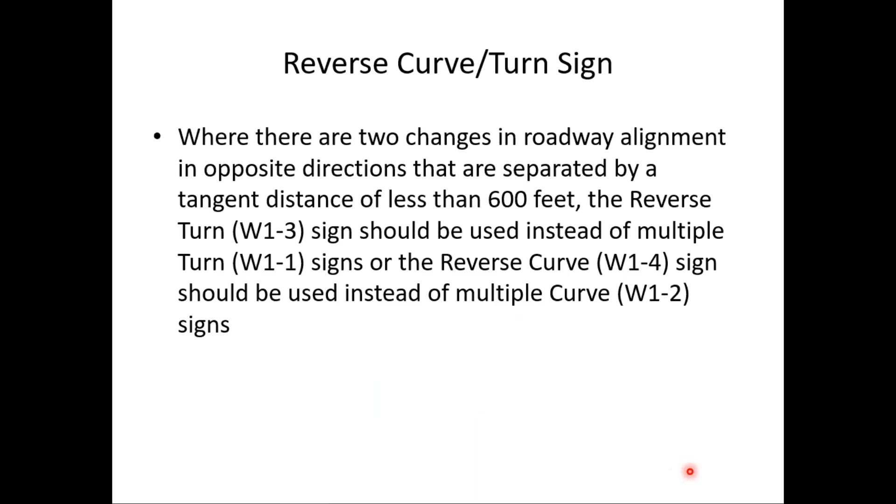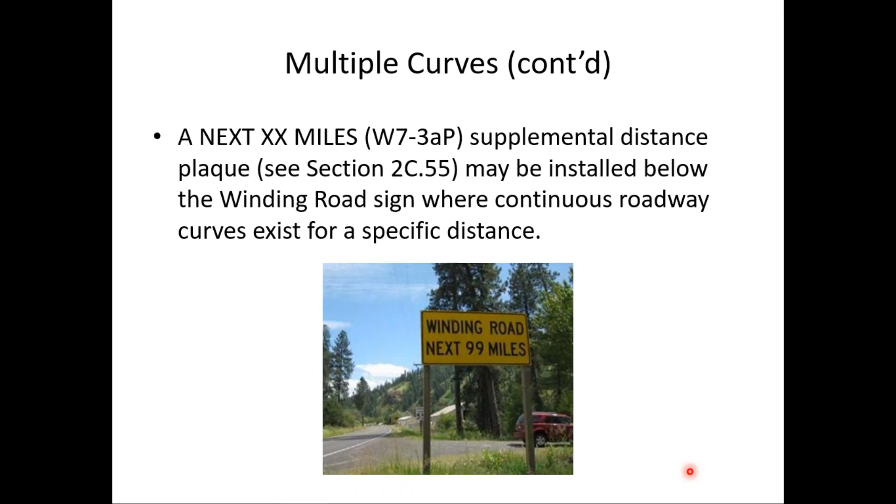They also talk about the reverse curve or turn sign and where those are to be used, and about multiple curves, the winding road sign, including the specific conditions where that would be used. You can also add a next-so-many-miles distance plaque below the winding road sign where you have a continuous roadway curvature existing for some distance.

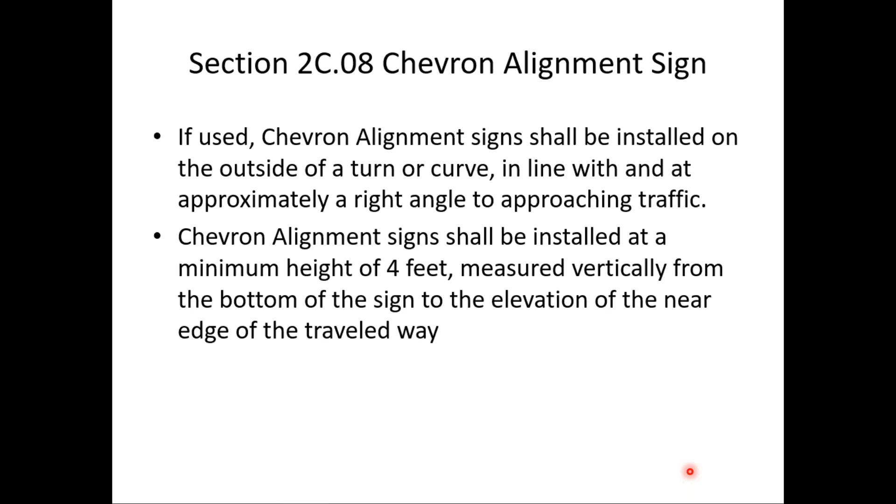Section 2C.08 also addresses the chevron alignment sign, and I think they've made this a little more specific than in previous editions. Notice, if used, chevron alignment signs shall be installed on the outside of a turn or curve in line with and at approximately right angles to approaching traffic. They shall be installed at a minimum height of 4 feet, measured vertically from the bottom of the sign to the elevation of the near edge of the traveled way. They specifically mention a minimum height of 4 feet, which I don't believe was in previous versions.

They also mention advisory speed plaques and what they call confirmation advisory speed plaques. The use of those shall be in accordance with table 2C-6, and they give the same advice I mentioned earlier in terms of determining the speed differential.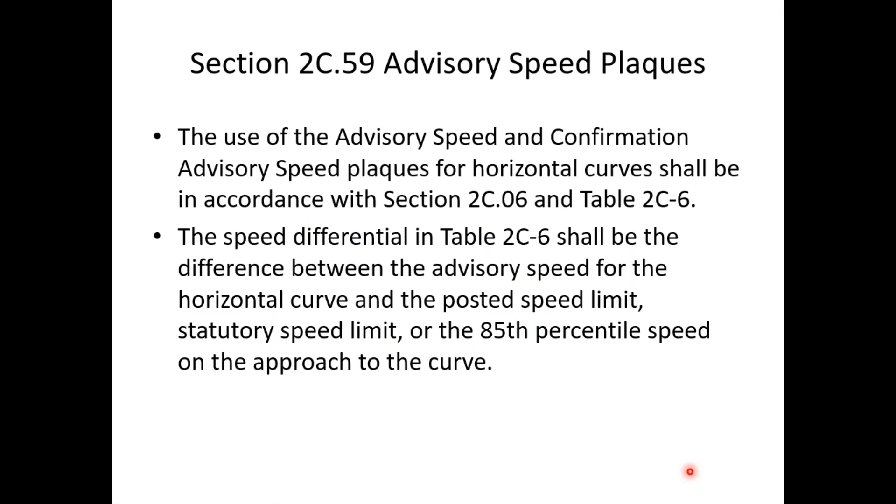So here's the advisory speed plaque. Note the turn warning sign with the advisory speed plaque underneath it. Notice they shall be used where an engineering study indicates a need to advise road users of the advisory speed for other roadway conditions.

And here is the confirmation advisory speed plaque. This can be used below, in this case, the right arrow. Notice both of these are optional.

They have table 2C-6 that specifically relates to advisory speed plaques, based on speed differential. For a 5 mile per hour differential, advisory speed plaque use is optional. A 10 mile per hour differential is recommended. 15 miles per hour or more, it's required.

A couple more notes: the advisory speed plaque shall only be used to supplement an advance warning sign. The advisory speed plaque or confirmation advisory speed plaque shall not be installed as a separate sign installation, and I think this is new as well. Sometimes in my travels, especially in small towns or villages, I would see that advisory speed plaque posted as if it were intended as a speed limit, but now the manual specifically prohibits that practice.

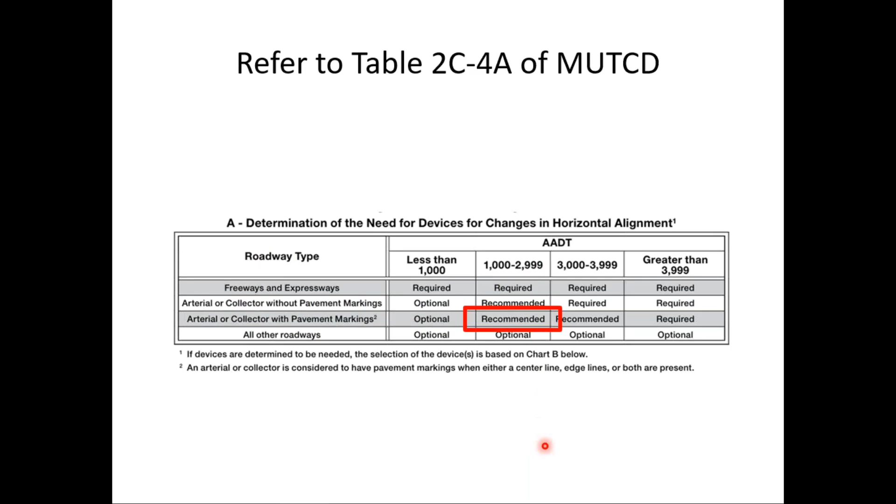And the AADT, what was it? It was 1,210, I think, so it falls within this range. This tells us that devices are recommended for this change in horizontal alignment. So then we go to part B, which would tell us what devices should be used.

So now we're selecting devices. In part B, one of the key factors is the speed differential. Let me back up here. We said the speed limit was 55, and the advisory speed is 40. So that's a 15 mile per hour speed differential, and that would be this row right here. The devices recommended here are delineators and an advanced horizontal alignment warning sign.

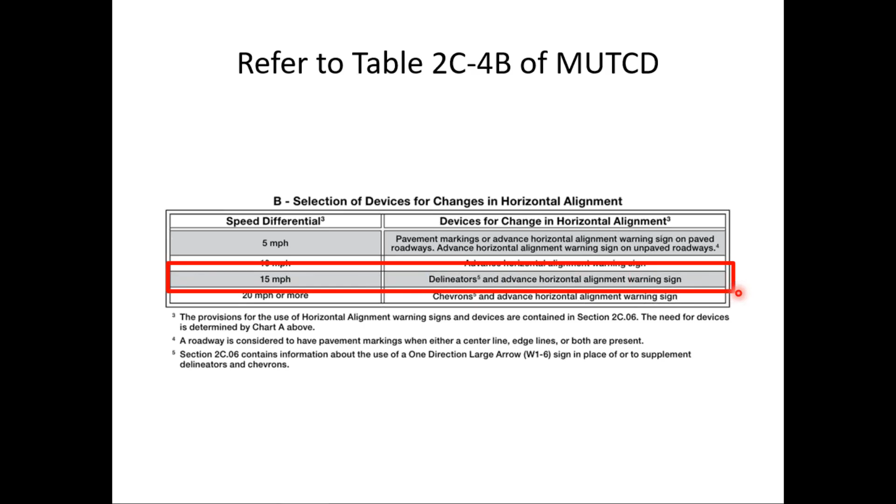Delineators would also include chevrons, which are considered a delineator. So delineators and advanced horizontal alignment warning sign. There are chevrons around that curve, or around part of it, so they've got part of that right. I would want to look at the appropriate spacing of those chevrons. And we have an advanced horizontal alignment warning sign, so let's take a look at that. Do we need an advisory speed plaque?

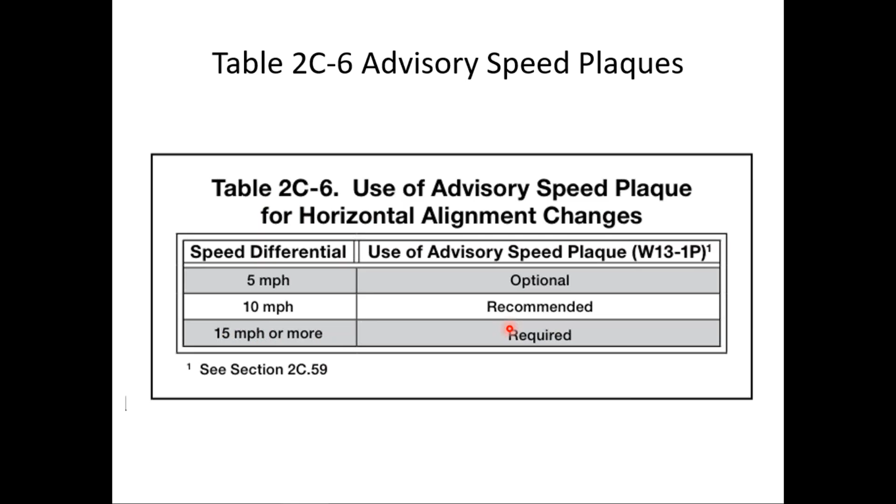Let me back up here. Notice table 2C-6: for a speed differential of 15 miles per hour or more, the use of an advisory speed plaque is required.

Chevrons are there, but they're not appropriately spaced. How would we space them? Back up to here. Advisory speed was 40 miles per hour, so 35 to 45, meaning the spacing of the chevrons should be 120 feet apart, according to table 2C-5.

So they have chevrons, but they need to be spaced about 120 feet apart around the full length of the curve. They have a warning sign, but as we just saw, for a speed differential of 15 miles per hour, which we have here, the advisory speed plaque is required. So that would need to be added to bring this into compliance.

No, thanks, Ron. Okay, thank you, Mike.

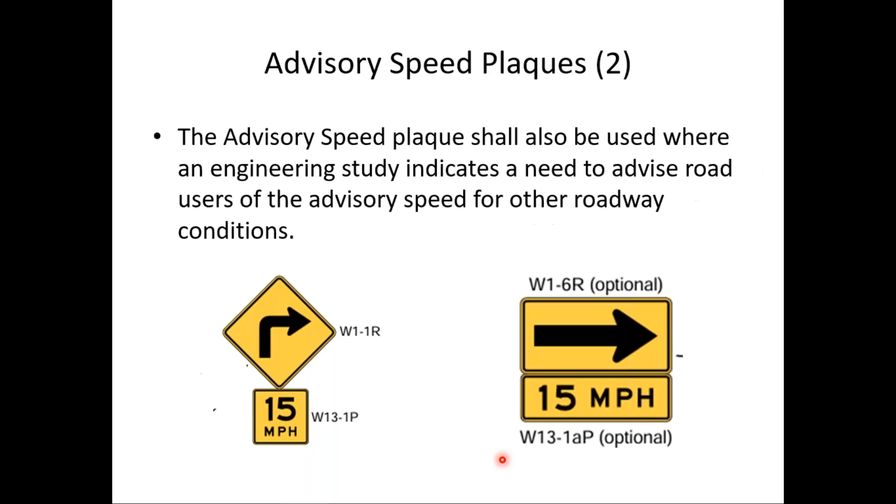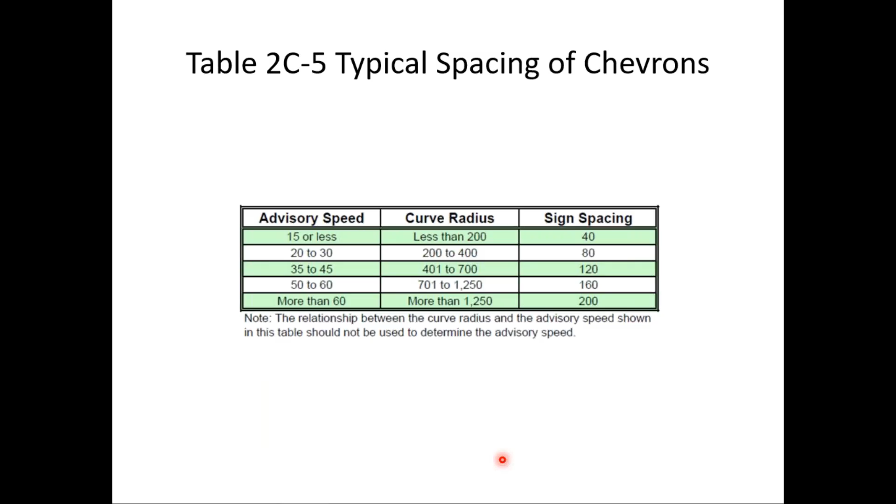Hey Ron, quick question from our previous example. Jeff asks, can you use a tighter chevron spacing than required? I would say yes. I'm not sure how it's worded here, it doesn't really say, but I would view this as sort of the maximum. I would say yes, if you'd want a tighter spacing, because there may be cases where that would be appropriate. I'd probably document why you were doing that and what spacing you were using, but I think that would be appropriate.

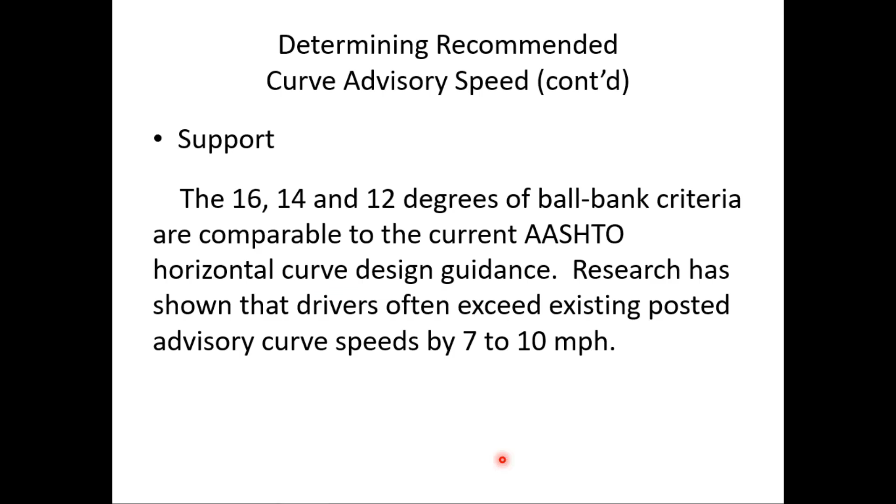There is some guidance available on advisory speeds. The Federal Highway Administration has procedures for setting advisory speeds on curves, and you can see what's in the handbook that they have.

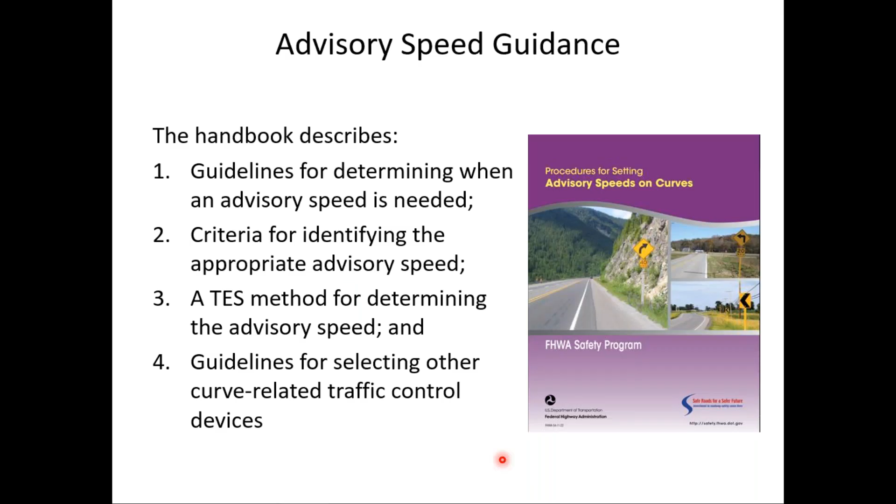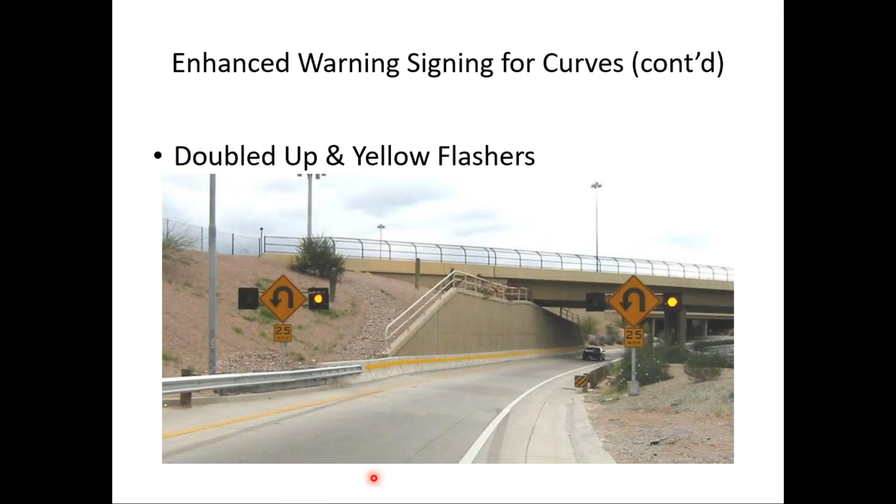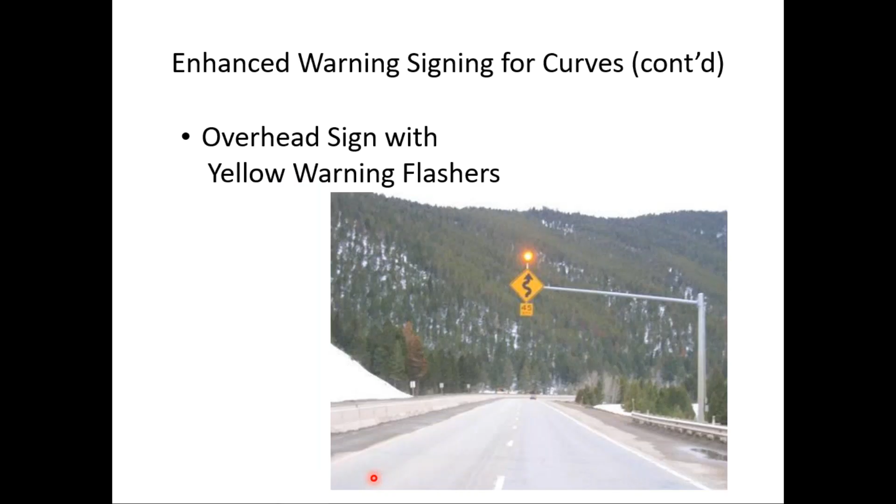This, I believe, is Colorado. Notice the sign is overhead with flashers. It's kind of in direct line of sight of the motorist. And maybe more recently, dynamic signs.